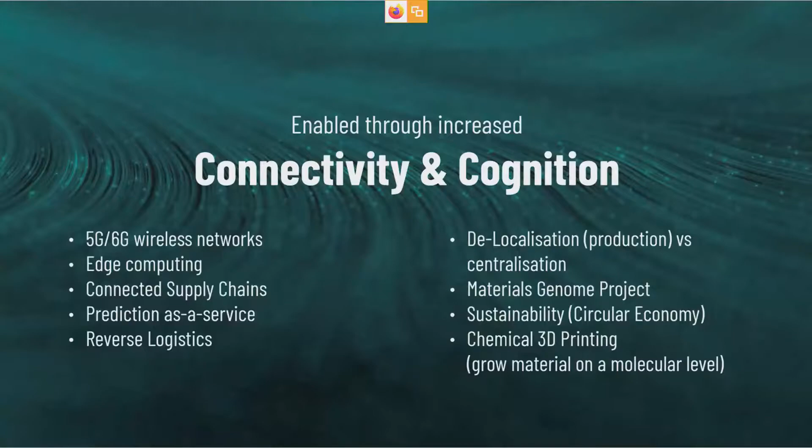One thing I want to mention here is the materials genome project. That's quite interesting for you as an owner of cargo and a vessel or even a fleet, because you can improve even the material of the things that you carry with you, but also the way how you operate with synthetic materials based on this genome project.

Let's go into some questions. If we think about current supply chains, if you reward the whole people that are part of your operations, of your supply chain as such, how can you incentivize them? If you would incentivize them through a liquid supply chain, so they get money if they stick to more SDG goals, this might be an interesting approach to become greener.

Because then you get rewarded for becoming green and being green. So what if even procurement could have access to global logistic trading platforms for end-to-end delivery across the supply chain, across the verticals, because these guys are usually in charge to do the brokerage.

I think what's quite interesting for you to understand in the future is we will have artificial materials, and we will have freight that can broker itself along the supply chain through all life cycles in the circular supply chain - meaning a material in the circular economy could broker itself into the next cycle. The same would happen for freight.

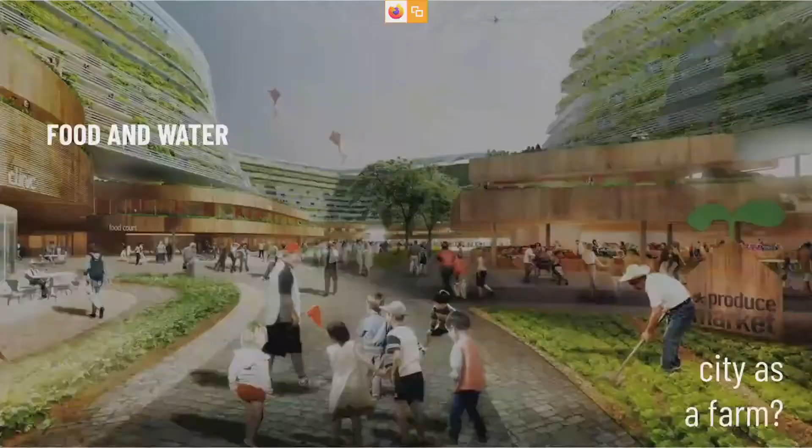I think what is impacting your industry is if we replace food and water with alternatives like lab-grown meat, which is already available. We will dramatically reduce our sustainability footprint and index, or the city acts as a farm, eliminating goods that you usually ship from A to B. If this happens, what is the impact for your industry, and how can you become part of it?

The whole healthcare industry is massively disrupted in the next years. It's a transhumanism future, so we won't have medicine in a traditional way. We might have little nanobots circling around in our body, giving you the dose based on your own conditions. If this happens, it will also reduce the amount of goods we need to move from A to B globally, even in trading markets.

The human being as well—Elon Musk was showcasing this with the Neuralink he demonstrated some 3 weeks ago. It's about enhancing the human being. Maybe we'll see a superhuman. This is one belief we see at the moment that might happen.

We can even connect brains together, or we will face a super intelligence—like we know from Hollywood, where one AI controls everything globally. It's a bit far away because we have limitations in the algorithms we know at the moment, but we will face more and more intelligent systems that are not only supervised or unsupervised, but will even learn on their own.

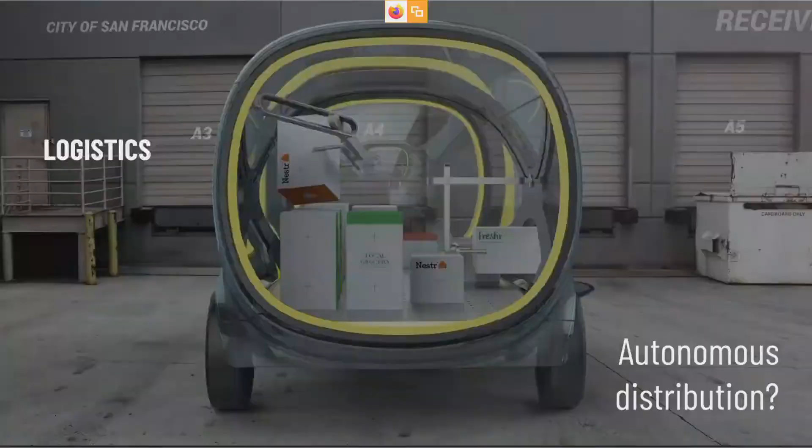The logistics of the future is massively disrupted by autonomous distribution, so goods can be carried to where you need them in very different vehicles—by drones, for example. What's already happening is we have fully automatic dispatch and flight even at the port, so there's exactly nobody interacting with the goods.

The shipping industry will mainly face human hands-free operation, so goods are fully automated, shipped from A to B, and the carbon footprint becomes nearly zero. You have super low energy consumption on a vessel because it's mainly run and operated by machines. If you do this, you have zero unplanned downtime, because the full maintenance topic becomes more self-steered. The less human interference you have, the more accurate the model can be for how you operate a vessel.

An underlying element is the internet. If we connect IoT and all these things, how do we even work together—us as human beings with machines? What we saw 3 weeks ago with gaming communities is more and more becoming a reality. We will face a 4D internet.

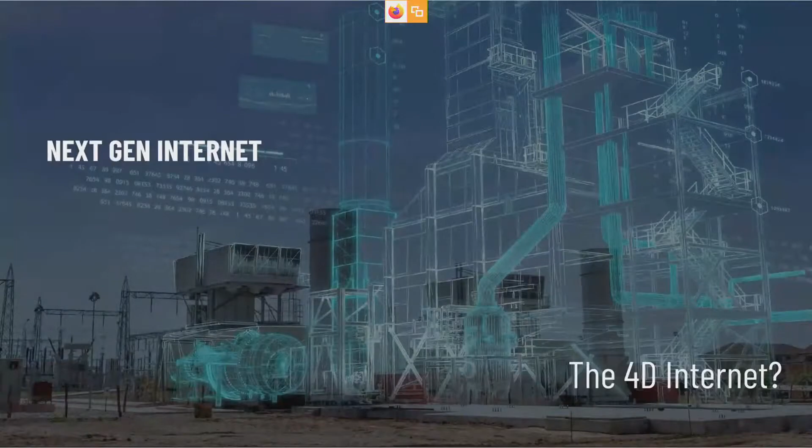4D internet is everything about a fully digitalized world. It's the digital twin world, where you have a static model enhanced with dynamic data, which allows you to do very different simulations of operational scenarios.

Some of you guys have seen this: the more we face automation, the more robots we will see. And it's not really about replacing humans with robots—it's about how we can interact and work with these machines together, because they will just enhance human intelligence.

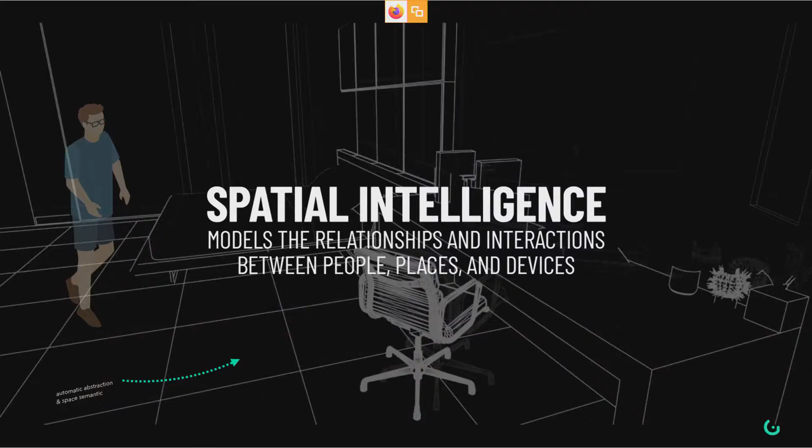This technology can already create relationships with you. If it can create relationships paired with spatial intelligence, it can even foresee the next steps before you know them. So it can optimize routines, guidance, the way you do your tasks, your daily routines on a vessel, if you have this interoperability layer.

We see more and more cognitive things. So a ship can talk with another ship, a fleet can talk with the port, and the port can talk along the whole supply chain, even going in this retrocasted way in the supply chain in a very different way.

We see, as I already explained, from a weak AI more going into a strong AI these days. There was this OpenAI project now launched in the next level, the GPT-3 model, where people were really amazed how far we are already with AI algorithms that can really understand and can partially give you reason why it has taken decisions, with a proof why and based on what insights.

As I mentioned, robots will become part of our society - on a vessel, on the harbor, in the whole manufacturing chain. And we need to figure out, it's not only human-centered, it's post-human-centered time that we are stepping into. So we need to figure out how we can work together with robots, but this is already happening anyway.

Autonomous shipping is a major topic here, that you have a self-aware multimodal logistics model. That means you have not only the port, or the port independent...

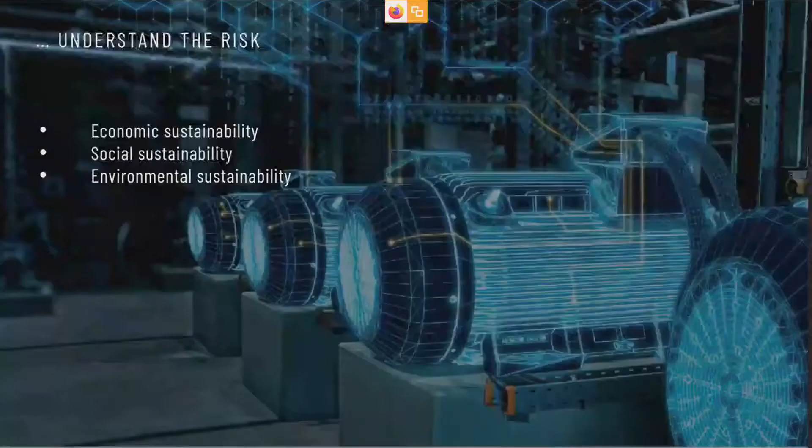I think the only thing that you have to consider as an industry are three key topics. Economic sustainability: staying profitable if you go into a future that is more sustainable, where you want to improve and lower your carbon footprint as an industry. You want to use, test and elaborate, but you should still thrive.

The social sustainability is how you take care of your people. We see there's more automation, more robotics coming in.

We have to take care of the people that work for us, they're part of the family. If you want to accelerate sustainability, there's also environmental sustainability, just to close this topic. It's really about taking care of the ocean, your operational environment, and what part you can contribute to a better, more sustainable world.

Finally, if we go to three slides— I have to stop you there because we do have a time limit. It does sound very interesting. I do want to ask you a quick question.

Because for many of us, this will still feel like a glimpse into a far future. You said that future is not as far away as you think. Yesterday we talked about digitalization within this industry, and there we were still talking about how to move away from an Excel-based platform.

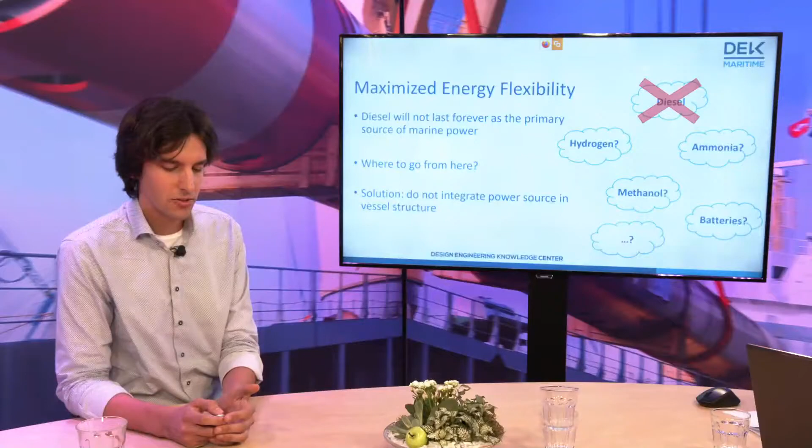However, at DEKC, we're looking at solutions to get around this so that what we do now will still be valid when the final choice is made. Our solution to this is to not integrate the power source of the vessel, of any ship, into the structure of the ship as is currently done.

The result of this is a little concept we like to call the FutureTrader. It's a small general cargo ship. In principle, it looks like a regular general cargo ship, but it has a little trick up its sleeve. Instead of integrating the full diesel powertrain, as you would normally do in a vessel structure, this vessel only has an E-motor, an electromotor, integrated into the ship, connected to the propeller.

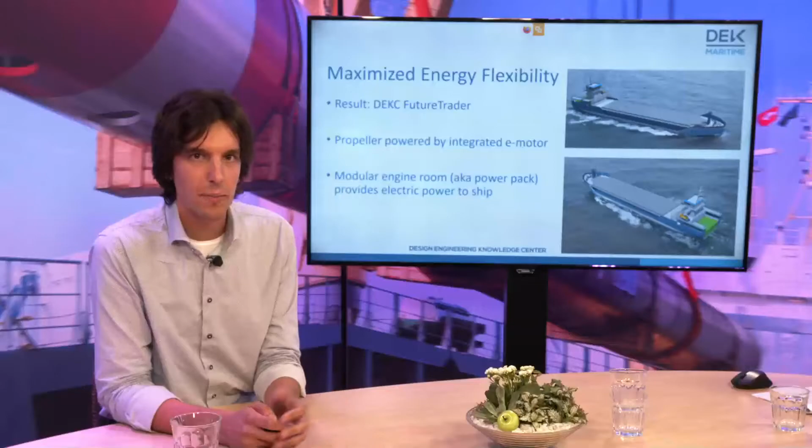And then what we do is we take the source of that power to the E-motor and just place it on the aft deck of the ship as a modular engine room, which we call the power pack. What this does is it provides electrical power to the ship. So that means you have a ship that is fed by electrical power and does not care where that electrical power comes from.

And what that entails is that you can have a ship that now is able to run on a diesel genset and therefore can be taken seriously in today's market. But in 20 years, or 10 years, or 5 years, when an alternative is available, for instance batteries or hydrogen, you can simply swap out the engine rooms and provide the power in a different way.

Regarding energy flexibility, it's a nice concept, but it is something we are working on as a concept still. It still needs to be developed. But it's not the only thing that you can do to make your designs future-proof as a ship designer.

As I mentioned, you can also very seriously take a look at minimizing your energy requirements, because whatever energy you use, it will always come at a cost. And therefore, minimizing your energy requirements will always save costs and also will save emissions, other logistics in the production of the fuel. It trickles down quite far.

And as designers today, we have a lot of advanced tools at our disposal, which we can use to help reduce the required power of a ship. We're really looking at modifying the hull and the powertrain so that it really requires the least amount possible.

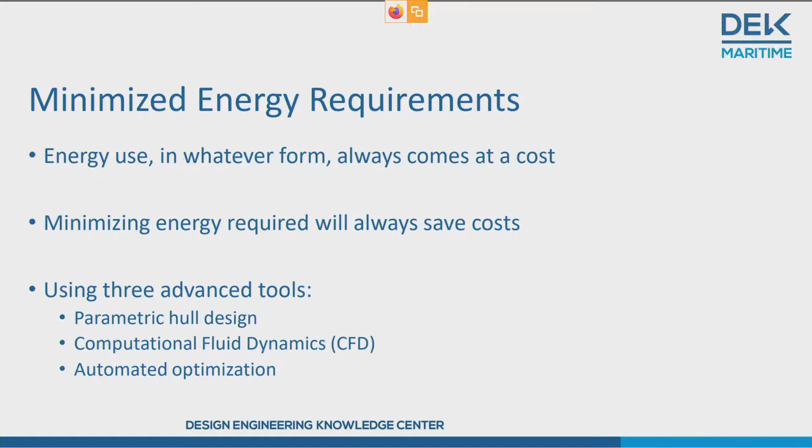Let's go back. There are three tools in our toolkit that we use a lot: parametric hull design, computational fluid dynamics, and automated optimization. All of these tools have methods behind them that are quite complex, but actually the implications are fairly practical and easy to grasp. So I'd like to go through these real quick to give you an idea of how we design ships these days to be as energy efficient as possible.

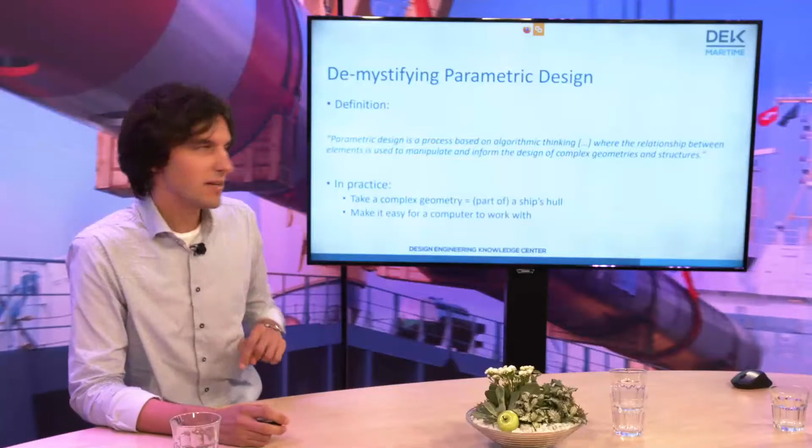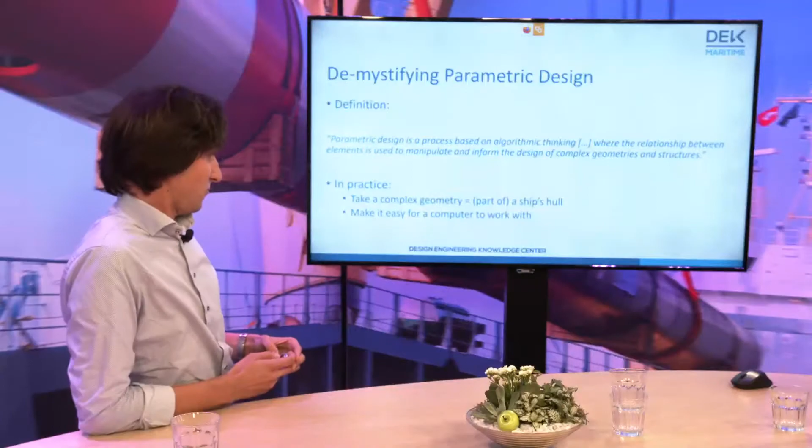Starting with parametric design, I found a definition on the internet which is: parametric design is a process based on algorithmic thinking, where the relationship between elements is used to manipulate and inform the design of complex geometries and structures. Well, I'm giving this presentation and even I am confused.

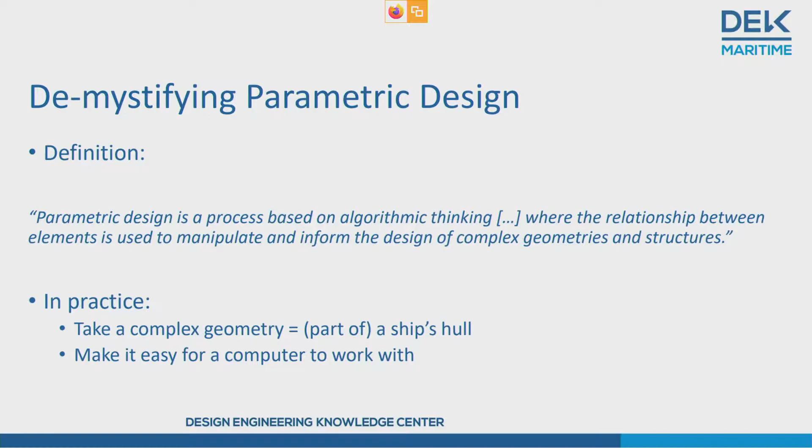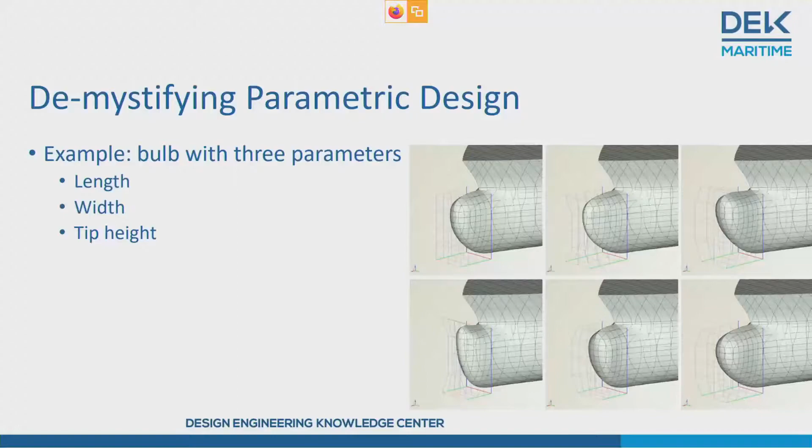But what this means in practice is fairly simple. The hull of a ship is a fairly complex geometry to define and understand, especially for a computer. So we take that geometry, or a part of it, and make it easy to understand for a computer. This still sounds abstract, so let me give a short example in the form of a bulbous bow. What we have here is a bulbous bow defined by three parameters: the length of the bulb, the width of the bulb, and the tip height of the bulb. With these three parameters, you can see six examples here, and you can really easily make lots of different variations.

Now, which of these variations are most valid and which will work well or not, that's the next question to answer. But the most important thing parametric design gives us is flexible and easy to vary hull shapes quickly, in a way that will also be understood by a computer.

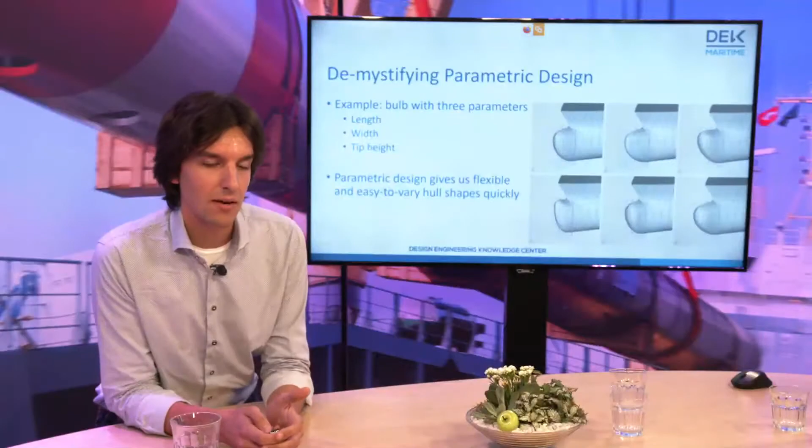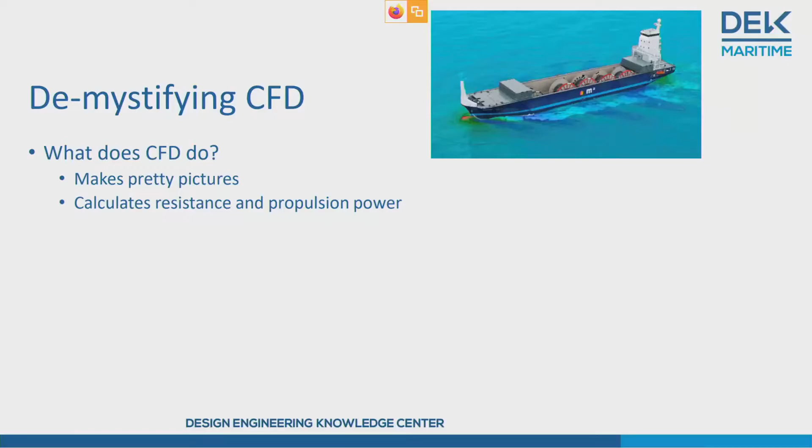So with these parametric hull forms, we can put them through CFD. CFD is often seen as a tool to produce pretty pictures of ships sailing through multicolored waves, but that's not really what we like to use it for. Well, it does help, but what's most useful to us as designers is that you can really accurately calculate the resistance and the propulsion power required by a ship.

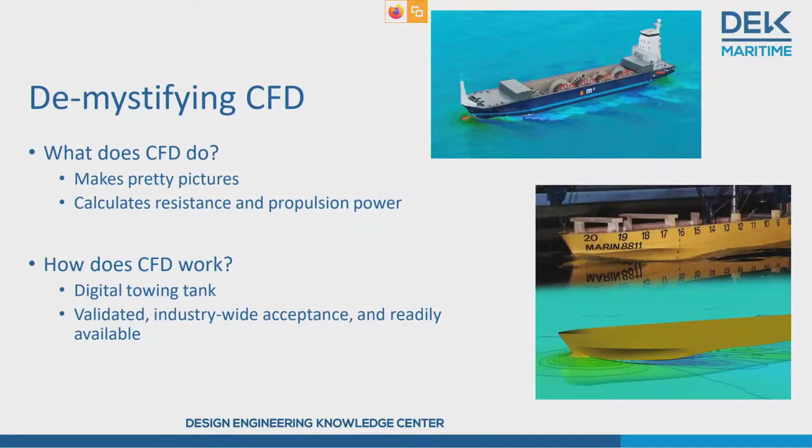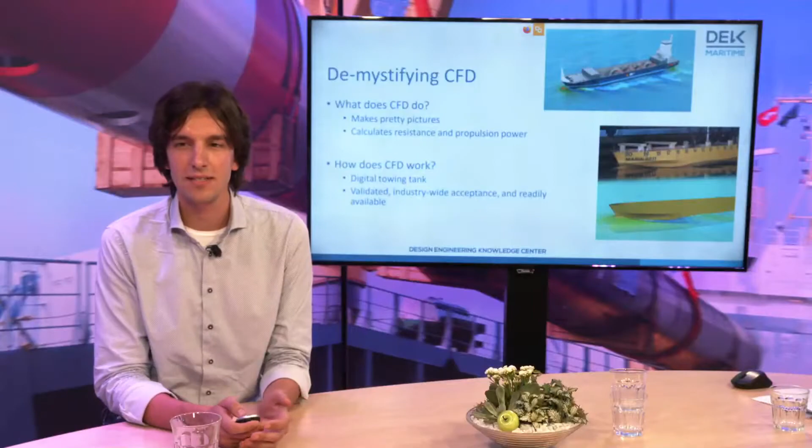You could see it as a digital towing tank, really. By now, as of 2020, this technology has been extensively validated. There's industry-wide acceptance for this, and it's readily available. We use this every day at DEKC at the push of a button. So to take away from this: you get accurate hull and power predictions from CFD, which allows you to predict how much fuel you can save for a given hull form.

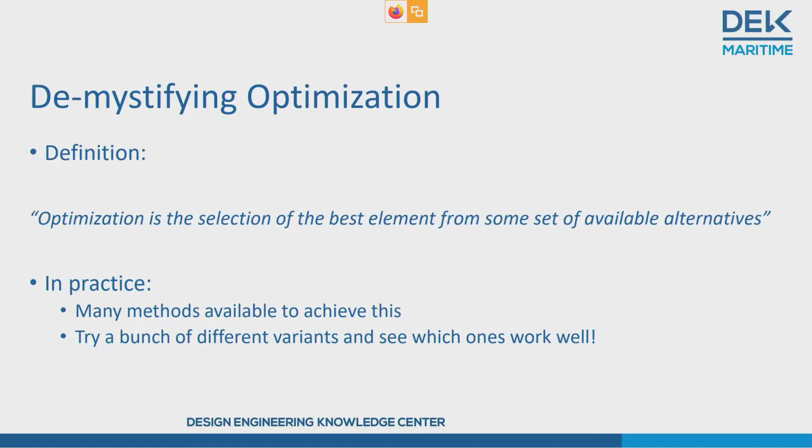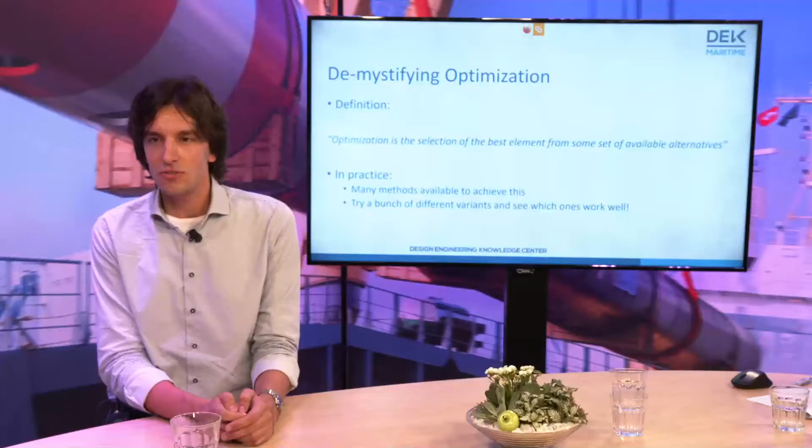Now that we have those two components, the final part of this toolkit is optimization. Again, I found a definition on the internet, slightly simpler: optimization is the selection of the best element from some set of available alternatives. There are many algorithms that exist to find the best solution to a certain problem within certain constraints, but what they all have in common is that they simply try a bunch of different variations and see which one works best. That's really all there is to it on face value.

The real trick is to use automated optimization, where you tell the computer what to do, how to make these variants, and it can go through hundreds of different designs, all checked at low cost. This is in contrast to a traditional approach, where manual iterations of a design might only allow a handful of different checks.

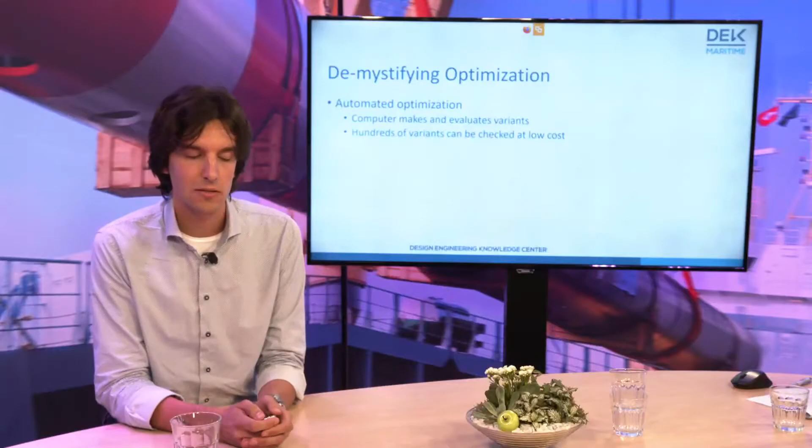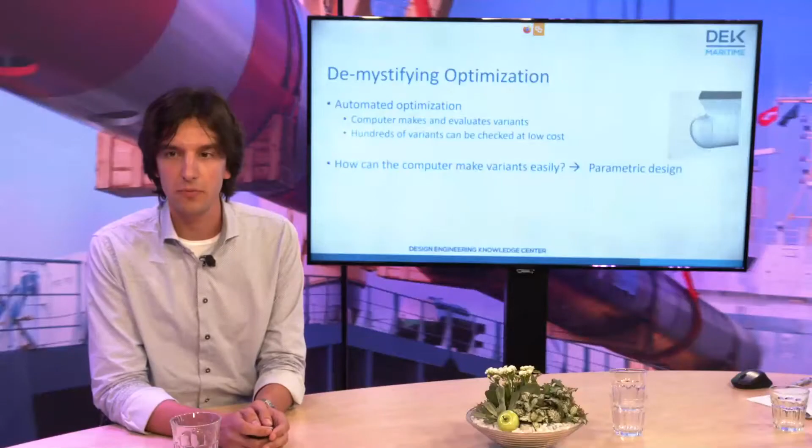So the computer can make variants easily. How can it do that? Well, we've discussed it already - we have our parametric hull forms, which can be easily modified by a computer. How can we evaluate how well these hull forms will perform? We've talked about that too - we use CFD. In combination, these three tools let you start from day one of a design to optimize its energy requirements and bring those down as far as they can go.

So to wrap it up, what are we working on right now? Well, like I said, this is all stuff that can be implemented in today's designs. So we use this approach in all our concept designs and further designs to reduce energy consumption.

We're heavily working on developing this power pack concept, as we really believe this is a good way forward for the industry, especially in the next decades. We also use our advanced tools, particularly CFD, to gain more insight into what else costs power on a ship. It's still very much in progress, but I hope to share more on that soon.

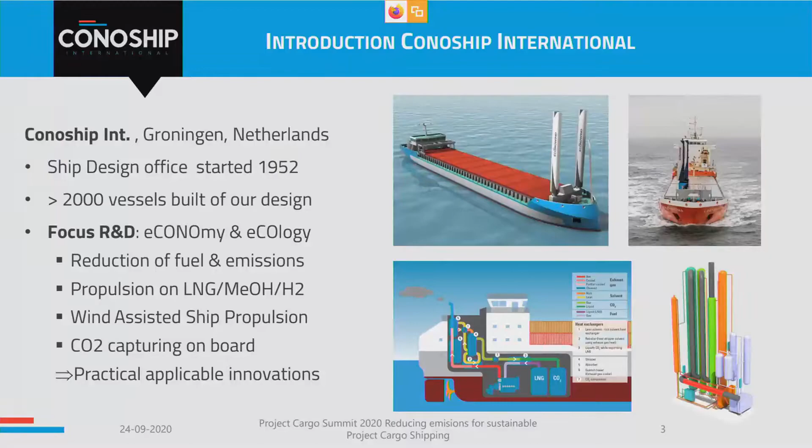We did a lot of investigation in wind-assisted ship propulsion. I'll come to that later. In the top pictures, you see some examples of that. Nowadays, we're quite heavily investigating CO2 capturing on board of vessels together with TNO in the Netherlands. We're always looking for practical, applicable innovations.

Reducing the emissions step by step follows, generally spoken, five steps. The hull design is the first one, always focusing on the lowest resistance using the tools presented before. Second step, as important, is focus on the propulsor, the large diameter propeller, and optimization of propulsive efficiency, which is not always behind the hull with the lowest resistance. There is a trade-off in optimization about that.

Third step is to find out the maximum amount of auxiliary wind propulsion for the specific ship being designed, and apply electric propulsion. Fourth step is, if there's no wind, what else? That's what we're working on - not necessarily the fourth step - but LNG, which is applicable nowadays quite well. And in future, consider CO2 capturing on board for designs applying LNG.

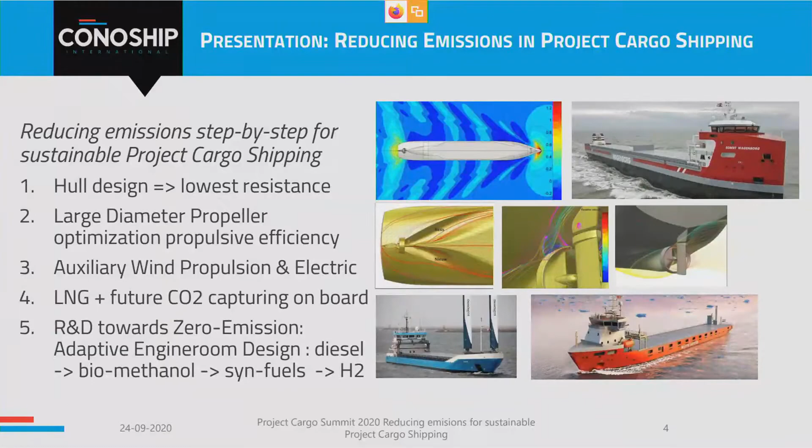The fifth step is R&D towards zero emission. The adaptive engine room design, as we see it, is a little more complex than presented before, but we developed quite a nice method considering different future fuel scenarios, like shown before.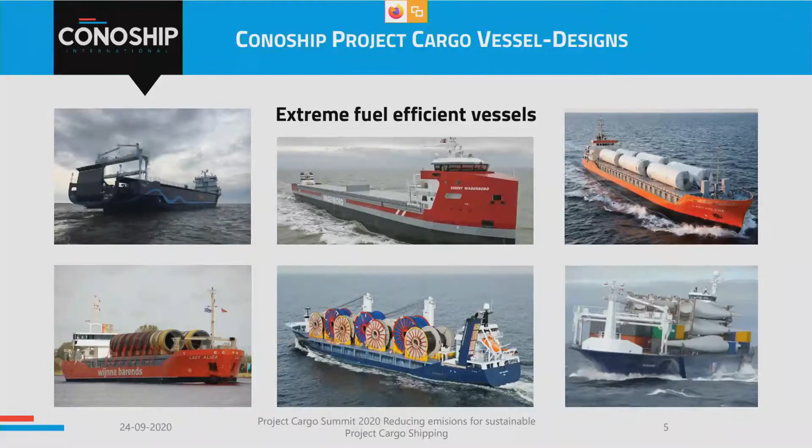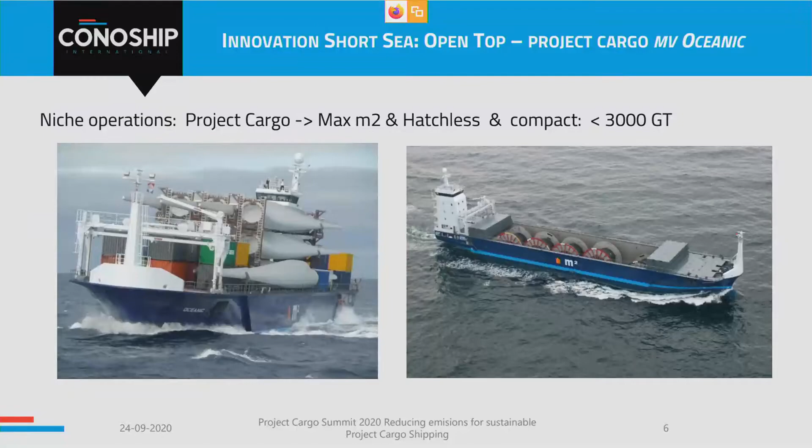This is the Oceanic we designed for Hartmann some years ago. You might recognize the right-hand picture - this is a photograph made by Flying Focus of the design that we made, including all hull lines, and the very efficient vessel.

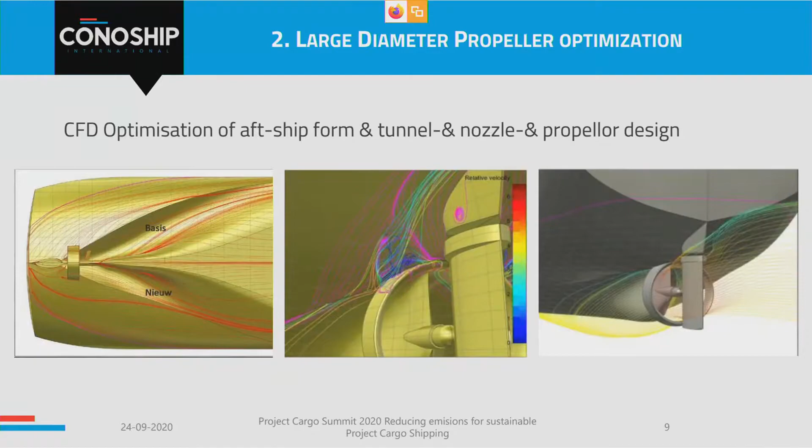Large diameter propeller optimization - we did a lot of investigation for the Lady Anna series: integrated optimization of hull lines, propeller design, nozzle design, and rudder design. And the effect is quite astonishing.

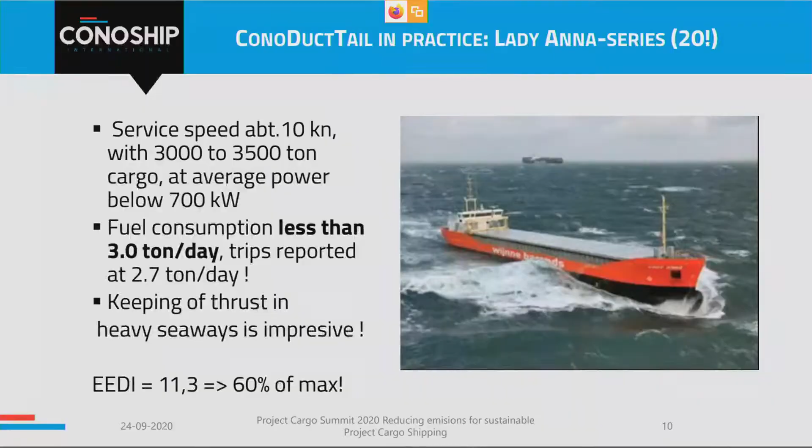This vessel, the Lady Anna series, 20 vessels of this series have been built. She has a service speed of about 10 knots, transporting 3,000 to 3,500 tons of cargo at an average power below 700 kilowatt. Fuel consumption less than 3 tons per day, which is in some situations 30-40% less than competitors. And she's keeping thrust in heavy seaways.

This is the new normal in short sea shipping. The additional thing we developed later on was the possibility for an open top hatchless notation for the same vessels already existing, so it's a retrofit hatchless vessel. The hatches are used as a breakwater with a draft limitation, extra bilge pumps. It's a very efficient project cargo shipping at the lowest CO2 emissions in a simply diesel version.

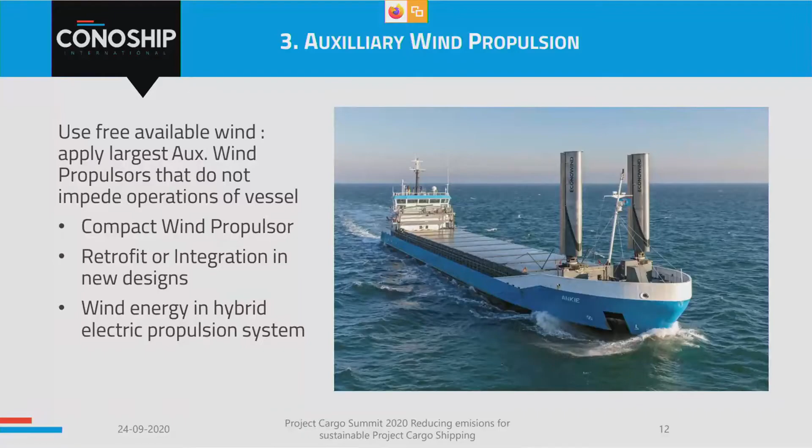Third step was auxiliary wind propulsion. Here you see the picture from Flying Focus of the motor vessel Ankie of Jan van Dam Shipping from Spijk. We think use this free available wind as it is on the oceans. Apply the largest auxiliary wind propulsors that do not impede operations of the vessel. Some vessels are frustrated by this kind of wind things, most not. We were looking for a very compact wind propulsor that can be retrofitted and integrated in new designs.

Future will be a combination of wind energy and an electric propulsion system, as we see it. We developed the Econowind unit based on the Turbosail principle of Jacques Cousteau. It took some time, from 2009 to 2018.

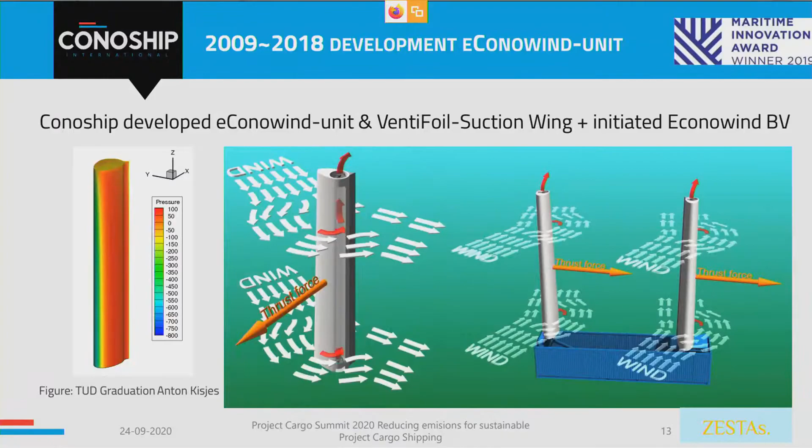On the left, you see the CFD calculations we did together with Delft University. In the middle, you see the principle. I won't go into that, but it's a very compact wing-like device with boundary layer suction as the big trick that increases the delivered thrust by a factor of 4 to 5 compared to if there was no boundary layer suction. The nice thing of this compact thing is that you can put it in a container, as you can see on the next slide.

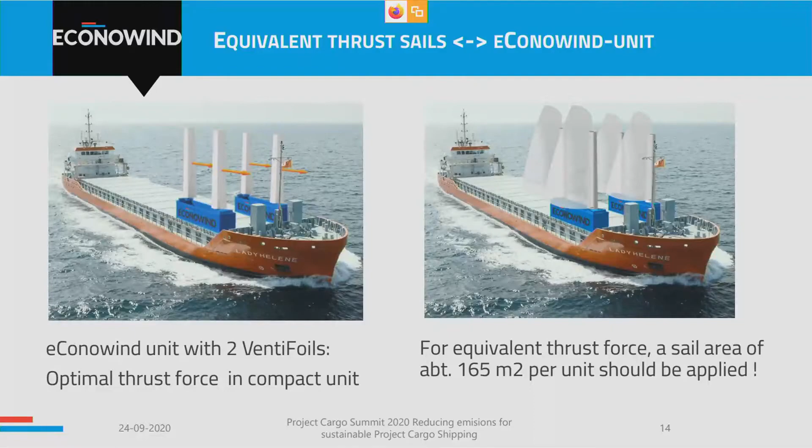And just have them fit in a 40 feet container. On the left side, you see the situation as it could be with 2 Econowind units on a short sea vessel, transforming wind directly to thrust. And to get an idea how much thrust can be realized with those 4 ventifoils, on the right side I projected the equivalent 165 square meters per unit that regular sails would need to deliver the same kind of thrust.

2018, the first maiden voyage was made, and the first fuel savings were already reported in that first maiden voyage, up to 8% with only 1 unit on this vessel, resulting in fuel cost estimates on the level of 2018 of 40 to 60,000 euros per year.

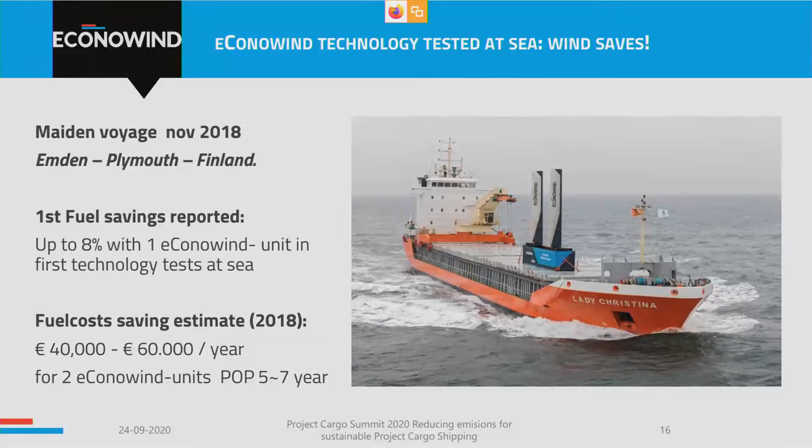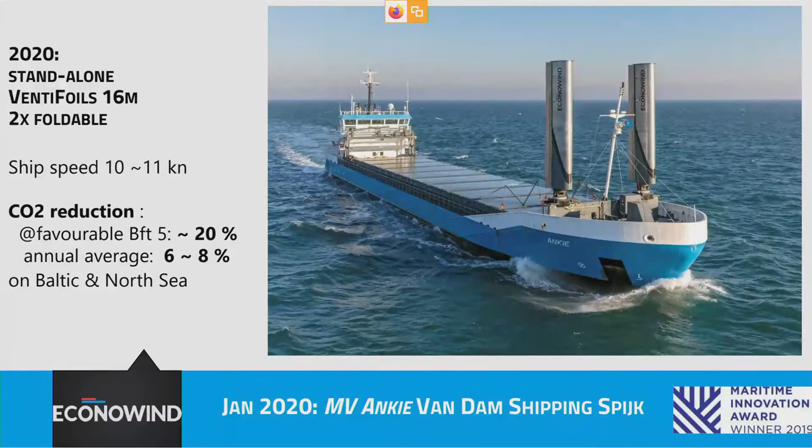This year, the Ankie started sailing. Pictures with the 10-meter ventifoils. They will be extended with another 6 meters in the second half of this year, resulting in CO2 reduction and fuel savings up to 20% in Beaufort 4-5, and annual averages up to 8%, sailing Baltic and North Sea.

LNG - this is the new design we made for Wagenborg. LNG integrated in the vessel. It's quite a trick to get this big tank in. There were 7 years of R&D at Conoship on LNG-fueled vessels.

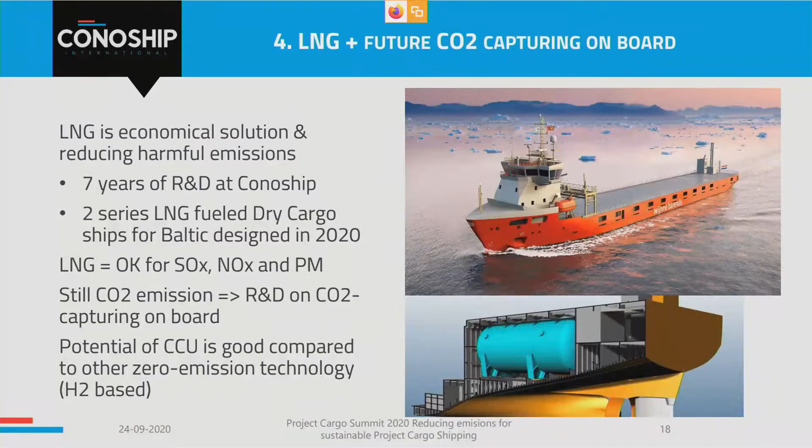2 series have been designed last year for LNG-fueled dry cargo ships for the Baltic. LNG is nice - it's okay for the SOx, the NOx, and the particulate matter or soot emissions, but there's still CO2 emission. So we started an R&D on CO2 capturing on board of LNG-driven vessels.

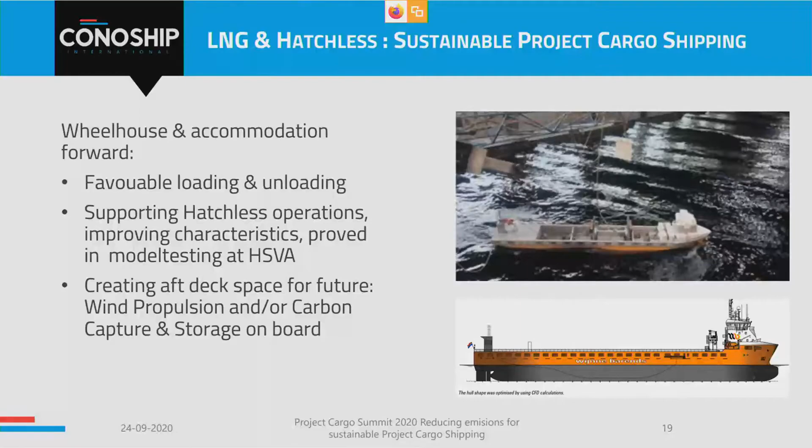On this same design, also this one can be hatchless. Wheelhouse and accommodations are on the forward side. It's favorable for loading and unloading and supporting the hatchless operation. Very interesting design.

The capture of CO2 is a proven land-based technology and comparatively simple, much less complex than for coal-fired or diesel-fired situations. The feasibility study focused on applying this known technology in a vessel, considering the size, weight, and roll and pitch effects.

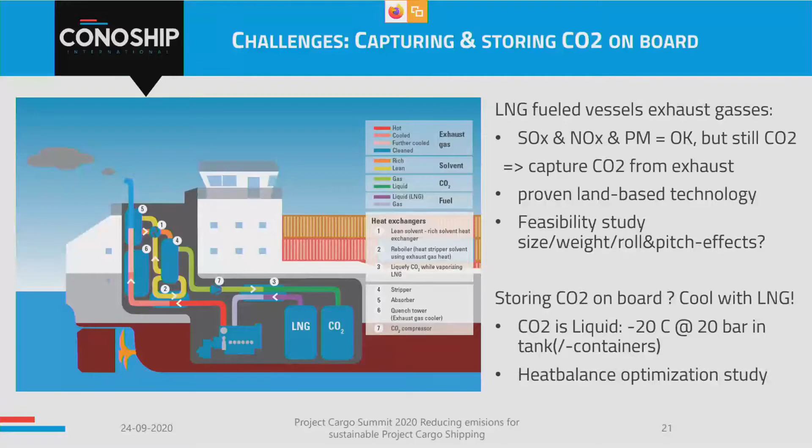A very interesting thing is that to store the CO2 on board, you can cool it down using the cold in the LNG, and liquefy it. CO2 is liquid at -20 degrees and 20 bar, and the LNG is on board the vessel at -163 degrees. That's a nice opportunity, and a big heat balance optimization, which is the interesting part.

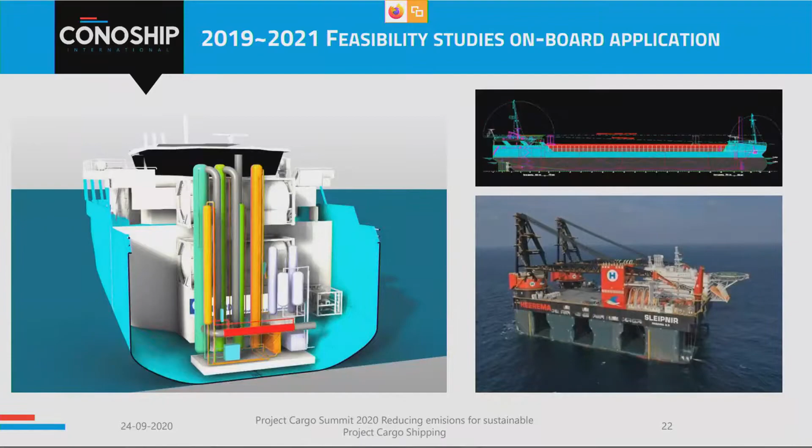This is how a CO2 capturing installation would look in a sea river vessel with a limited air draft. And right below you see the Sleipnir, the big crane vessel of Heerema. That's the subject of the project we're working on now, together with Heerema and TNO, developing a concept for CO2 capturing on board that vessel.

The nice thing for the future is that you can create a closed carbon loop. LNG consists of methane. This methane burnt in the engine results in CO2. You capture the CO2 and sell it as a feedstock for producers of synthetic e-fuels. The synthetic e-fuel methane can then be used to fuel the vessel again. Then we have a closed carbon loop and the vessel is CO2 neutral in the future.

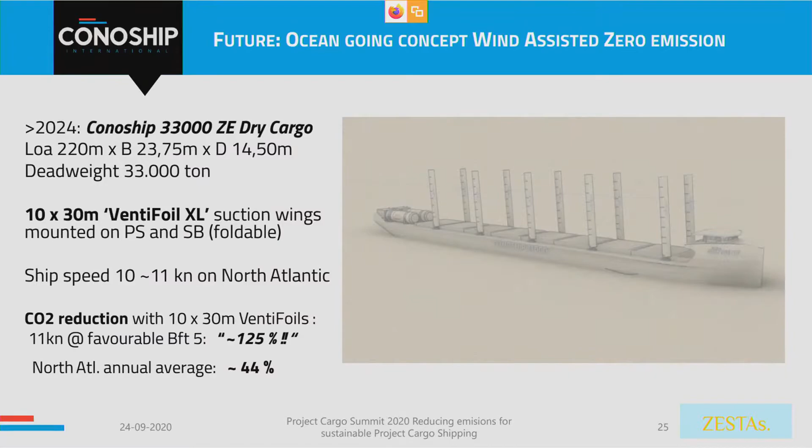This is how it goes down. This concept has 10 ventifoils, a fuel cell of only 2,500 kilowatts, which is enough to propel this vessel at 11 knots, and liquid hydrogen tanks that are already available on the market. It's a very interesting concept on which I could talk for hours more, but that will do another time.

I'm actually happy you showed those slides because that is a very interesting concept. There's also quite a bit of interest in these wind-based solutions in the chat function.

Before we go to that, I'd like to touch back on the poll. Before we started the program today, we asked viewers what they think is the way forward. Will it be hydrogen, or a mix of renewable solutions? Looking at your presentations, I clearly see a mix of renewable solutions. That is also in line with what most viewers thought: 56% said that will be the way forward, while 22% said it will be hydrogen. So there's still a little bit of debate going on there.

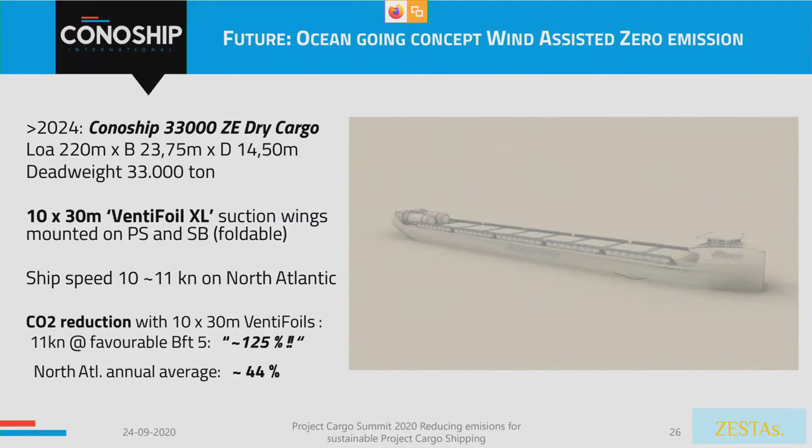You just fold them down, fold them upward if you want to sail. They're not there yet, they're in development. This is a concept study to find out what we can gain if we develop these kinds of ventifoils, and this is the direction we can develop the results. Integrating them into the design of the vessel is a very interesting challenge, but it's doable, we know how to integrate them. They should never frustrate the cargo operations, that's the first thing we hear all over the place, but that's possible with this compact thing. That's the advantage of why we choose this ventifoil as a wind propulsor.

There are flettner rotors, but the flettner rotors are very hard to make foldable, it's almost impossible. There are more options, but we think this ventifoil is the most compact, delivering the most thrust in the smallest compact package.

There's a question from Albert Jan Aars about the return on investment on these ventifoils. That depends strongly on the area where you sail, if there's enough wind, on the number of days. In the picture, the Lady Christina was sailing on the Baltic in quite regular trade, I think. At that moment in time, the return was between 5 and 7 years.

That's okay, but it still is a concern for a number of ship owners. It's not automatic that you save enough diesel to justify it. It's doable and it's very okay to do it, but in future there will be more reasons for using the sail. In our vision, it's the first step you should always take to limit the CO2 output.

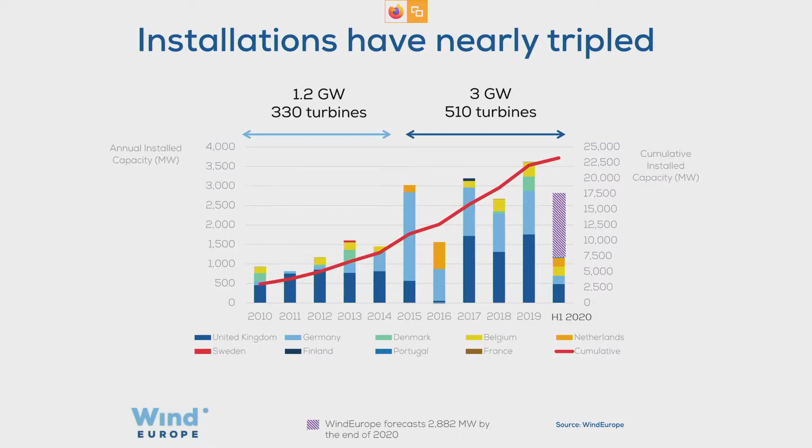Today, we are installing turbines of roughly 8 megawatts capacity, and the trend continues to go on. On average, we will be installing 15 megawatt turbines by the end of the decade.

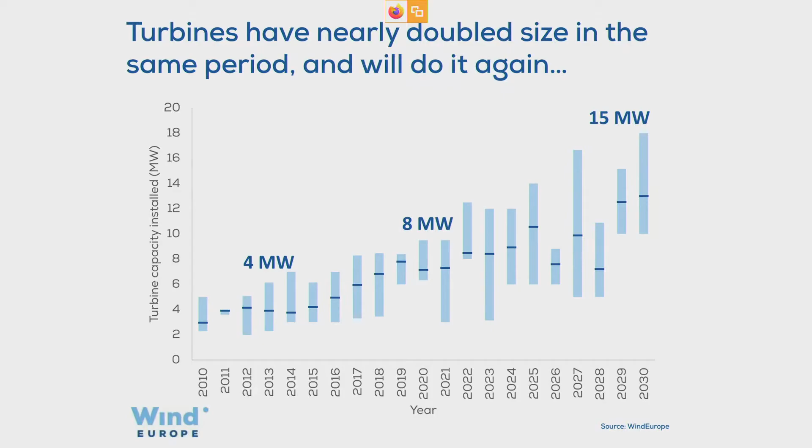Turbine manufacturers might not be aware, but they actually influence the rest of the supply chain for offshore wind, because as turbines get bigger, we have new challenges for how to mobilize and lift large components, and where to store these turbines at ports, to mention a few.

We just saw that we're installing on average 50% more turbines. So scaling up the capacity of the turbines is not the only factor that took us where we are today. We also became much more efficient with time.

I want to highlight 3 actions that allowed our supply chain to become much more efficient. The first one is a steep learning curve. Of course the learning process was not easy, but it has allowed us to learn from other sectors and to gain experience from every project that we have.

The market visibility and government support are key. For the past 10 years, we now have recurrent auctions for at least 400 megawatts across different countries, mainly in the North Sea at the moment. These have given the sector and the supply chain enough visibility and a steady pipeline between 10 to 15 years ahead to make the required investments.

We also have a dedicated supply chain for offshore wind. This includes different components, like the fact that the industry is now adopting 66 kV for inter-array cables in all projects, or the balance of plant, including the substation, switch gears, and all the equipment that needs to be suitable for the offshore environment too.

Slip joints and new transition pieces, foundation and installation methods are other examples of how we now have a dedicated supply chain. And of course, the vessels, a very important part that was discussed earlier today, serve every step of this project. So this requires a large coordination effort.

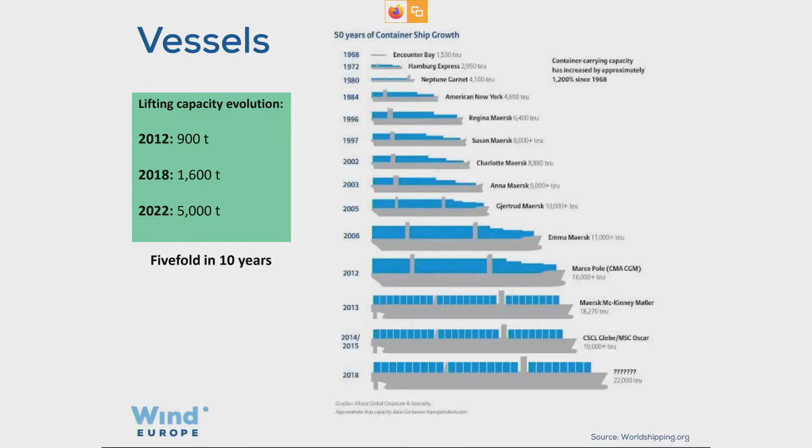Ports are needed for all of the activities between sea and land: manufacturing, assembly, installation, and operation of wind farms. Sometimes the amount of time and money ports need to have the right infrastructure is overlooked by the industry. Just like any wind farm, ports also need to obtain all the permits and have a strong business case to make the investment, and they also need to reach financial close.

The inbound logistics can also be quite complex if there isn't good coordination in the supply chain, because they are delivering components from different places into the port. Even if ports offer flexibility today, the wind industry should learn and think of the logistics in the future more like a serial production to become even more efficient.

So let's give an example. It would be good to think of dedicating the largest vessels, as I was mentioning, which will also be the most expensive, only to critical lifts, and the smaller ones to other activities, so as not to saturate the port, which will also be handling multiple projects in parallel.

If this was perhaps not enough challenges already, there will be floating wind at a commercial scale too. In the next decade, we'll have the first floating wind farms, mainly in France, the UK, and Norway. By 2050, from the 450 gigawatts needed to reach decarbonization, nearly a third will be floating. Floating wind, as opposed to bottom fixed, carries most of the assembly onshore, so space will surely be a bigger constraint. It will be important to transfer and adapt the know-how from bottom fixed, but also to find innovative ways to manage the logistics, which other countries may already be looking at.

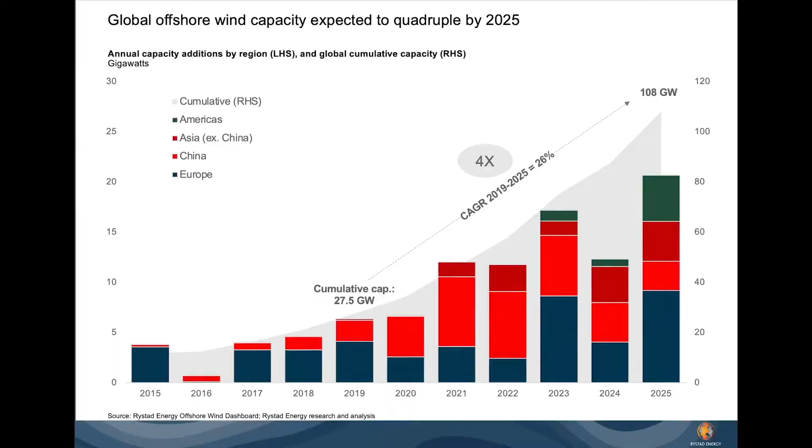Going forward, we do expect that offshore wind will continue to grow in popularity with falling cost, with increased focus and digitization post-COVID-19, meaning in terms of forecast, we're expecting this 27.5 gigawatts to grow to 108 gigawatts towards 2025. To achieve this quadrupling in installed capacity, we are going to see the annual additions of new power production grow in the order of 10 to 15, even up to 20 gigawatts every year.

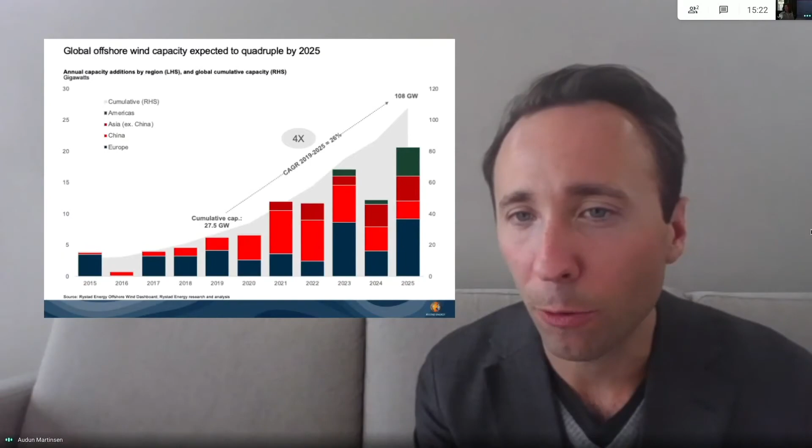Europe is going to make up a large portion of this growth, but with China and investments and the policies provided by the government, we're going to see a major step up in installed capacity over the next years, driving most of this growth towards 108 gigawatts in 2025.

If we exclude the Chinese market and Americas and zoom into Europe broken down by countries, you'll see the main countries driving the European market are UK, Germany, and Netherlands. In Europe alone, installed capacity will more than double from 2019 to 2025, reaching 52.3 gigawatts.

We also see new countries being involved in this space, with more developments happening within France and also in Norway.

What's really interesting is that many spectators of the offshore wind market expected it to slow down in the second quarter of 2020 due to COVID-19 and the risk of investments. But what we saw was actually the contrary - energy companies continued to invest more into offshore wind. COVID-19 did not really stop any sanctioning activity.

Operators and owners went ahead to sanction projects in France, such as Fécamp and Saint-Brieuc, and we also saw similar projects within Germany and Netherlands with Hollandse Kust Zuid and also Seagreen Phase 1.

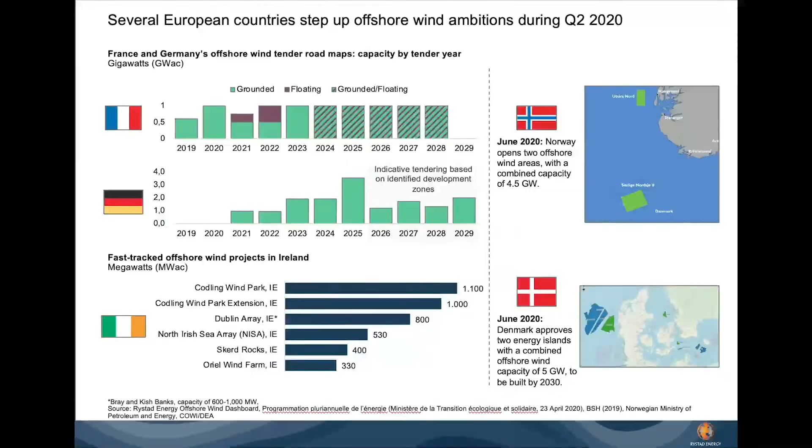The reason we're achieving this is because oil and gas and energy companies are focusing a lot on the offshore wind side, and because governments around the world are supporting initiatives. This is especially true for countries such as France, Germany, Ireland, Denmark and Norway, which are now opening up new offshore wind areas and working on tendering and roadmaps to achieve more offshore wind capacity over the next decade.

This is going to really help companies involved understand where the good investments are to be taken and where the most capacity is for them to add to their portfolio.

We also see that energy islands are becoming more and more of a preferred development choice, where, for example, Denmark is approving islands of up to 5 gigawatts to be built by 2030, increasing their total capacity and keeping them as the 4th biggest offshore wind energy producer in Europe by 2030.

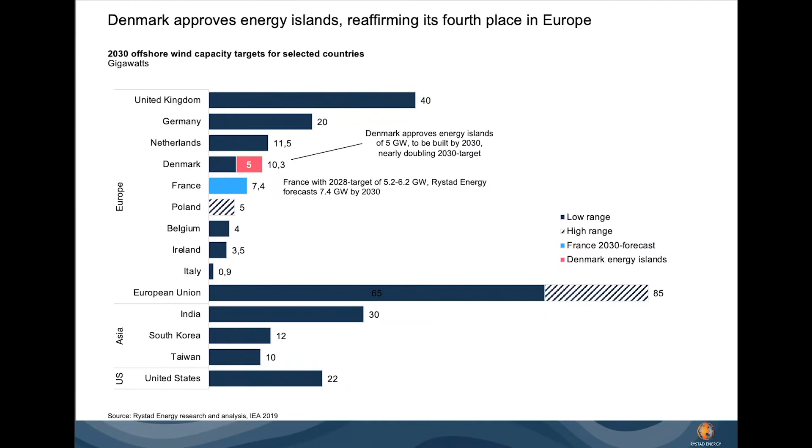France also, with their 2028 target of about 5.2 to 6.2, we expect by end of 2020s they could achieve 7.4, and then in 6th place we have Poland, followed by Belgium and Ireland.

In total, the European Union will then make up potentially up to 85 gigawatts in installed capacity by 2030, still overshadowing the developments in Asia outside China, and also the US.

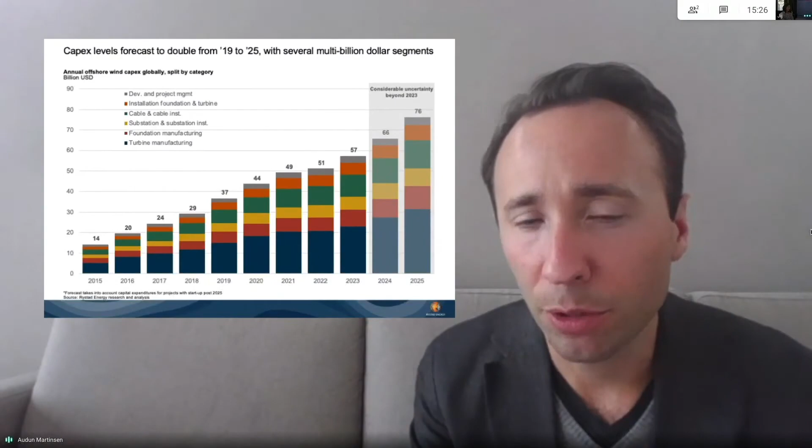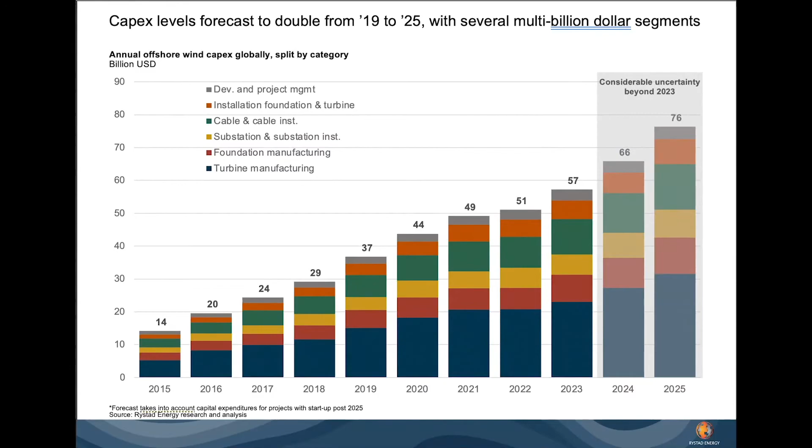Investments will follow from all of these ambitions. We will see that companies involved would like to deploy capital reaching about $76 billion in 2025. In 2019, that number stood at about $37 billion. So we're talking about a doubling in investments, and due to economy of scale, it's not going to resemble that quadrupling of capacity.

But still, this number is quite immense, and it's something that will really benefit the suppliers within this supply chain, who can reap the benefits of turbine manufacturing investments, foundation manufacturing, and also installation of cables and substations of the turbines themselves. That's a really interesting market for many suppliers involved within the traditional energy service space.

These investments are continuing to grow at a time when the overall oil market is quite bad and challenged. Because of COVID-19, we've seen oil demand destroyed, and with that, oil prices have fallen, and investments within traditional oil and gas have fallen dramatically.

With offshore wind investments continuing to grow, especially here in Europe, you'll see that offshore wind investments in Europe will be bigger than within upstream oil and gas in 2022. That's going to be the case even if oil prices recover toward 2025 - offshore wind will still be the energy space offshore that has the most dollars deployed.

And that is why we now see many of the traditional suppliers within offshore oil and gas moving into the wind space.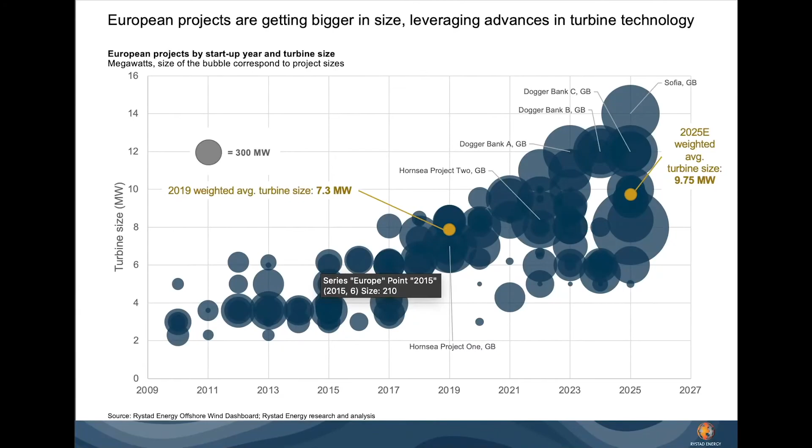This is also happening because offshore wind is becoming more and more competitive, with more projects able to run without subsidies. If you look at the average installed turbine size from 2019 to 2027, it has grown from 7.3 megawatts, and will reach up to 10 megawatts by 2025, potentially growing even higher. New technology revealed by turbine manufacturers shows turbine sizes that can easily go to 14 megawatts, maybe up to 16, and potentially up to 20 over the next 10 to 15 years. With that, cost per megawatt installed will drop, projects become even more competitive, and investments will flow into those markets.

This will be built upon the competence within oil and gas companies like Shell, Equinor, and Total. BP are companies that have large potential and high ambitions to grow their renewable portfolio, continue developing their concepts, get projects into application, reach financial close, and develop these projects. We're going to see many more of the likes of Total, Shell, and Equinor move into offshore wind and continue developing projects. We saw this recently where BP teamed up with Equinor and bought part of their portfolio in the US, because these projects are so mature and interesting for these mega energy companies to take part in.

The same is happening on the supplier side, where traditional suppliers within offshore oil and gas are now also looking at offshore wind to grow their revenues. They are acquiring, spinning off, and improving their product portfolios to be ready to set growth targets going forward and take part in this major trend.

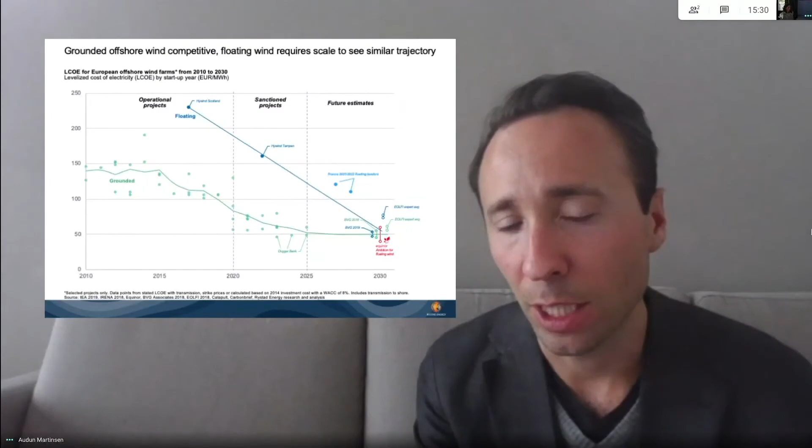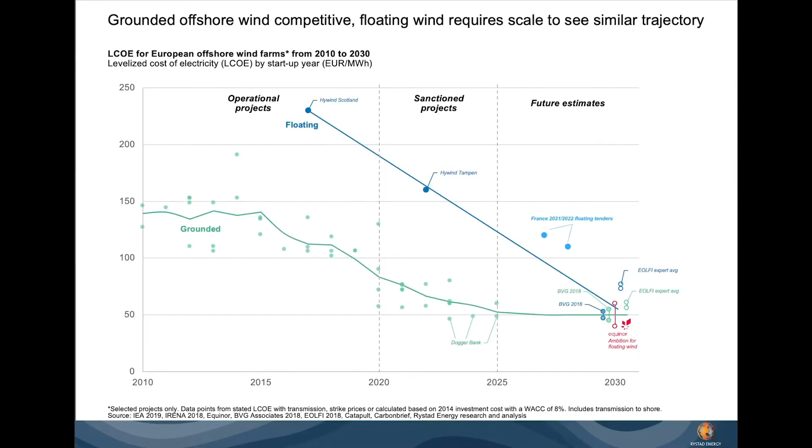We should also touch on the floating offshore wind market, which will continue to grow going forward, but it will take some time. For recently sanctioned projects, the levelized cost of electricity is still almost twice as high for floating offshore wind as it is for grounded offshore wind, meaning costs need to come down further on floating units. With bigger turbine sizes and learning effects, we will see improved costs, and we think that by the end of 2030 we might have cost parity, where the levelized cost of electricity for grounded and floating offshore wind will be very similar.

We expect to see more investments taken within floating offshore wind, but investments will also continue within grounded offshore wind. It's going to be hard for floating wind to significantly increase market share versus grounded wind, but it will happen. By 2030, we expect floating offshore wind to make up about 5% of overall capacity installed every year. In terms of cumulative installed capacity, we might reach about 6 gigawatts by the end of the 2020s, which could then triple to about 15 gigawatts sometime in the 2030s.

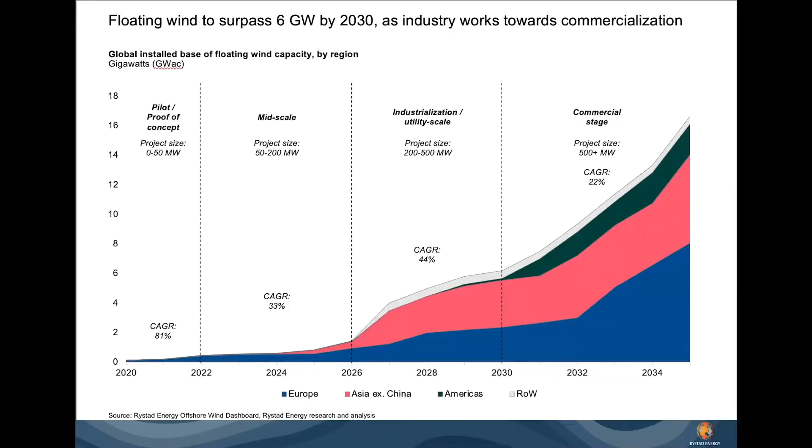To summarize, we expect the offshore wind market to continue to thrive. We expect a quadrupling in terms of installed capacity and a doubling in investments, where Europe will continue to double its installed capacity, and investments will actually be bigger than oil and gas. This will attract companies that have predominantly been in oil and gas to take part in offshore wind, and we will see faster development of those projects and improved economics.

Thank you so much. My name was Audun Martinsen, representing Rystad Energy.